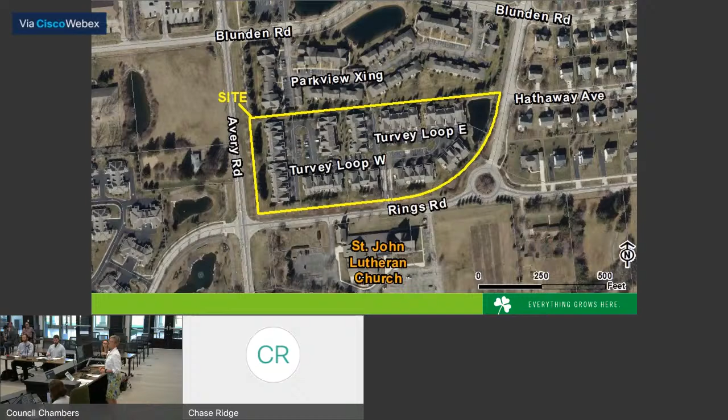Thank you, Madam Chair. Good evening, Commissioners. This is the Balgriffin multifamily chimney request, specific address 6138 Turvey Loop East, and it is an amendment to a final development plan. Here on the map, you see the extent of the townhome project within the Balgriffin PUD. It's at the northeast corner of Avery Road and Rings Road. Highlighted here is the specific building that we will be talking about. There's one unit that is making this request. It's in the center of this particular building.

A little bit of background for you. In 1993, the Balgriffin PUD was approved. In 1999, both the preliminary and final development plans were approved with a condition of approval that read that rear and side elevations, which will be most visible from public streets, be revised to reflect the same level of quality of materials and detailing as front elevations. As it turned out, all of the elevations were developed the same. In 1999, the townhomes were constructed. Sometime between 1999 and now, in this one unit, structural issues have occurred. The applicant is here tonight to talk about those in detail. But here we are in 2021 with a request to remove the chimney from this particular unit.

These slides show the existing conditions at the back of this one building. The yellow area outlines the chimney in question. Please take note of the materials, because what's being proposed is that the materials will match exactly. Also take note of the role the chimney plays in the architectural interest on this building.

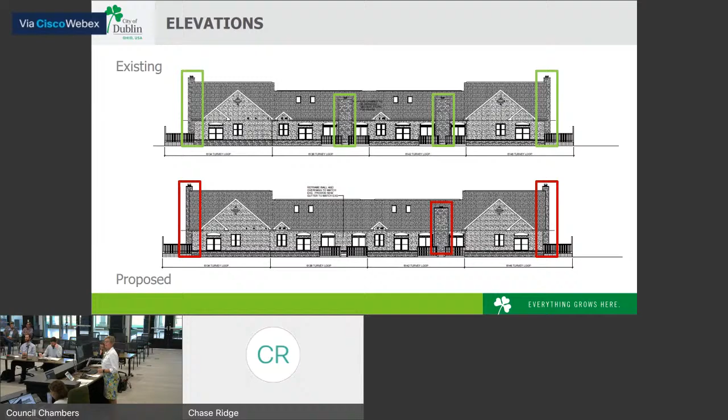Walking through the proposal in some detail so everyone understands the exact proposal: the chimney would be removed. The stone would be saved to reuse later in the project. The stucco would be patched and painted the Sherwin-Williams quinoa color. The roofing, cricket, and gutters would also be patched.

Proposed are timberline shingles in a weathered wood. The stone water table would use the recycled chimney stone to be patched. The deck would be patched, and an electric fireplace would be installed so that no outside venting is required.

We did review this application against all of the amended final development plan criteria, and staff is recommending disapproval with the following findings. Visual interest was an important element of the 1999 application, specifically that the architectural detail was supposed to be the same for front and rear. Removal of the chimney reduces the detail significantly on this facade.

Secondly, the originally approved facades relied on stone-clad chimneys as a primary element of interest. Removal of one chimney in an otherwise symmetrical facade does not meet with the intent of the approved FDP.

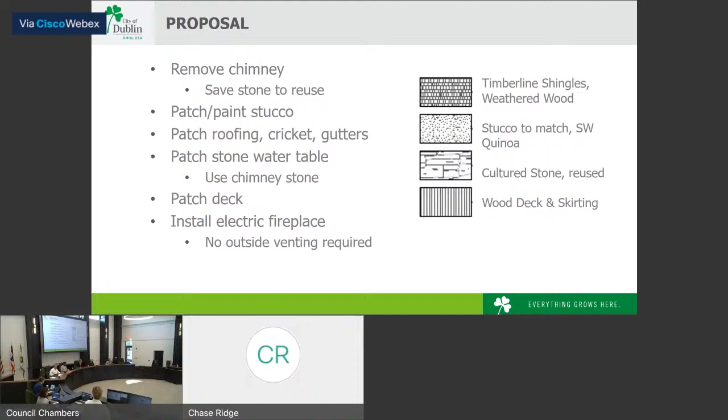and highlight the public streets that adjoin the development? The public streets are Avery, Rings, and Blunden Road. And the intent of the original application was that the facades facing public streets were the ones of most concern. Is that correct? That is correct. Okay, thank you.

Any other questions from the commission for staff at this point in time? Mr. Schneier: In the planning report, it was indicated that the Building Standards Division had a recommendation, or suggested a recommendation, for the hydraulic, the sistering, et cetera. Could you expand on that a bit, on what process they used?

I don't want to pretend to be a building inspector or someone who knows too much about construction, but more than me. The way I understand it, this particular chimney, which is cantilevered off the floor joist at the first floor, is now too heavy for those joists and is causing a kind of rotation inside the building. The possible remedies included sistering the floor joists. This unit does have a basement, and there are certainly foundational options like mud jacking and other kinds of jacking systems you can use. That's about the extent of what I know.

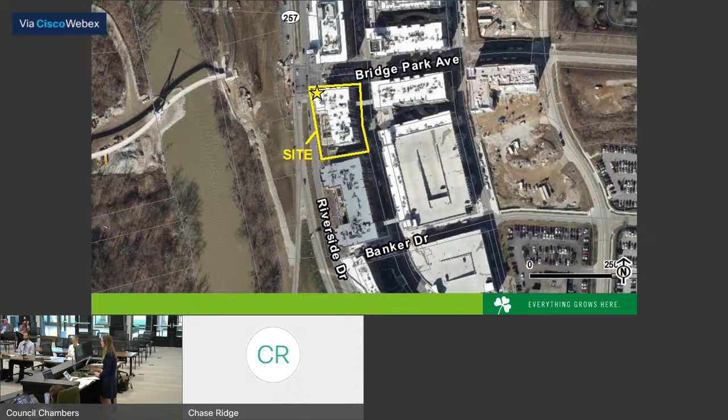A bit of development history that the commission may recall: this development was originally approved in 2015. At the time, the developer was required to designate a shopping corridor. Shopping corridors are intended to be uninterrupted pedestrian ways that allow for the activation of the public realm for outdoor seating and dining. The shopping corridor comes with an additional requirement that 12 feet of width be provided.

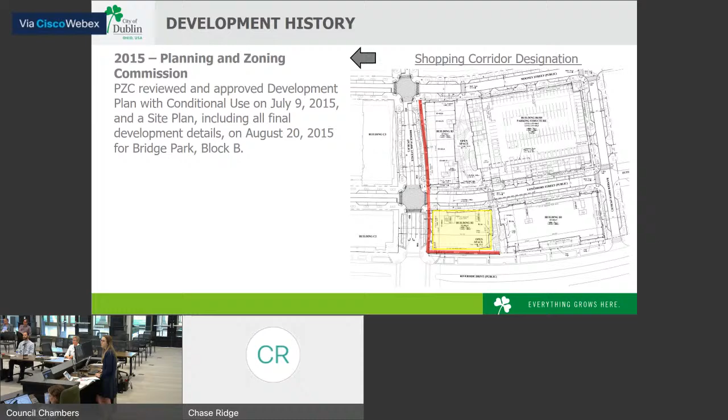Additionally, the Pocket Plaza located adjacent to this tenant space was also approved as part of the open space plan. At the time, there was a condition of approval, detailed in your staff report, that the developer work with the city and the Dublin Arts Council to finalize elements in that Pocket Plaza. The tenant modifications this evening are triggering compliance with that condition, as well as considerations of the details, not only within the public realm, but also on private property, as shown on the screen.

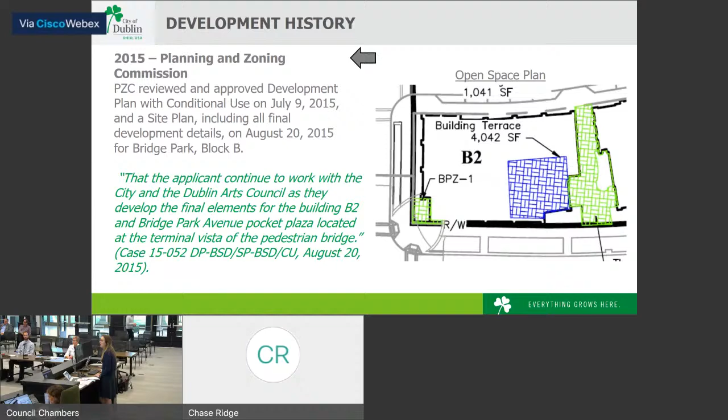A bit of case history: as the commission may recall, this has been before you twice before at the recommendation of the administrative review team. The commission made a number of comments which the applicant has addressed, including enhancing and elevating the design to create a sense of place. You'll see the updates between June and August on your screen, being reviewed here on the second day of September. The applicant has retained the Pocket Plaza.

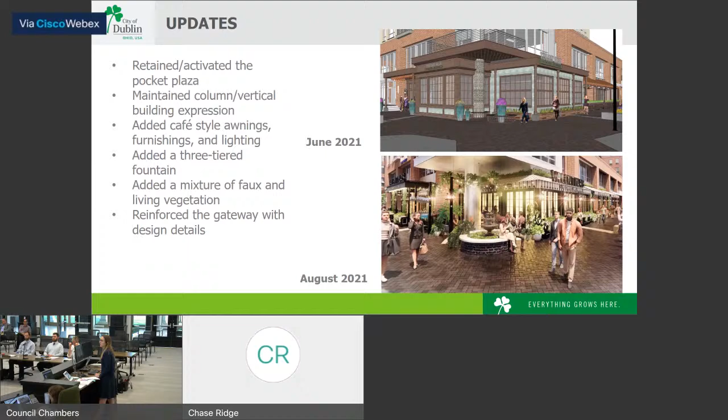You'll notice that the addition is no longer encroaching to the same extent it was previously. With that, the column and the vertical expression of the building from grade to the upper stories is also retained. The applicant has incorporated a number of the inspiration images that the commission previously identified, including Parisian cafe-style awnings, furnishings, and lighting. Additionally, at the corner a 3-tiered fountain is proposed, located within the City of Dublin right-of-way. The design is augmented with a mixture of artificial and living vegetation, and all of this together really reinforces that gateway design.

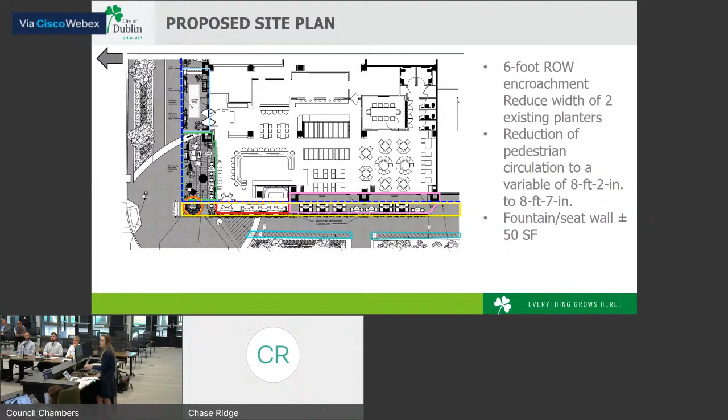The right-of-way line here is denoted in a dashed royal blue line. In yellow and teal, you'll see the proposed 6-foot right-of-way encroachment, as well as the modifications to the existing streetscape planters to reduce their width by approximately 2 feet, allowing a total clear area of approximately 8 feet in width, where 12 is required. Staff is recommending approval of a waiver to permit a reduced sidewalk width in this area, as doing so would achieve the goals of the Bridge Street District by allowing additional opportunities for outdoor seating and dining that engage the pedestrian realm.

Here are photos of the existing conditions of the site. At the request of the commission, the engineering technician and planning technician with the City of Dublin visited the site this morning and taped out the blue line, which is the right-of-way line. You can see it best up against the building. The yellow line is the proposed new face of building, and the orange square is the portion of the fountain located within the public right-of-way.

You'll notice on the right-hand photo there are a number of flags appearing in the planter bed. Those flags are intended to indicate the modification to that planter area. So you'll see a reduced pedestrian area that's also increased by those modifications to the streetscape.

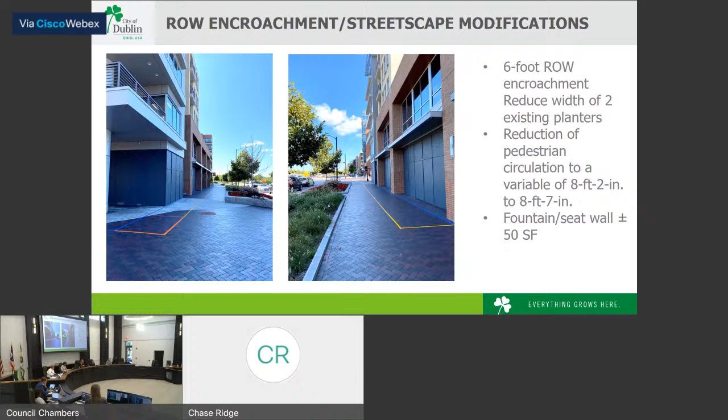Additionally, detailing—excuse the interruption, Nikki. Can you go back one image? On the left image there, in the planter, that what appears to be a red line, is that a continuation of the flags to indicate where the new walk path would be? Yeah, so the red line is the beginning of that. Okay, thank you. Again, excuse the interruption. Yeah, no worries, that's a great question.

So in detail, the Plaza and Fountain is located in this proposed orange area, partially along private property and mostly within the right-of-way. Planning, parks, engineering, and police are recommending that the fountain be eliminated with this design. The conceptual design is provided on the screen and is approximately 4 feet in diameter and 7 feet in height.

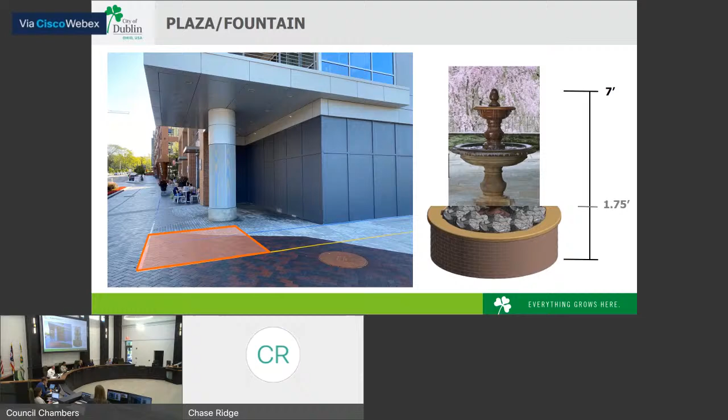In review of this element, it does further constrain the pedestrian realm within the public right-of-way and is visually incongruent with the established streetscape character as well as the base building.

So the applicant has provided a number of character images which fully detail the proposed restaurant. The entry located along Bridge Park Avenue is highlighted by a proposed canopy structure.

The canopy is black in color and will be grounded with planter boxes with a gold accent. The entry incorporates additional storefront windows as well as a revolving door. Interior to the canopy, there are marquee lights as well as the additional layer of detail to incorporate coach lights as well as an awning valance.

The awning valance design is carried across the extent of the storefront facade. So at the intersection of Riverside Drive and Bridge Park Avenue, the applicant is proposing to activate the Pocket Plaza. This Pocket Plaza would still be publicly accessible, although would be amenitized for customers of the restaurant.

So the applicant is proposing to further define the space with landscaping and lighting, as well as to highlight the portion of the enclosed patio space with a partial awning as well as operable windows.

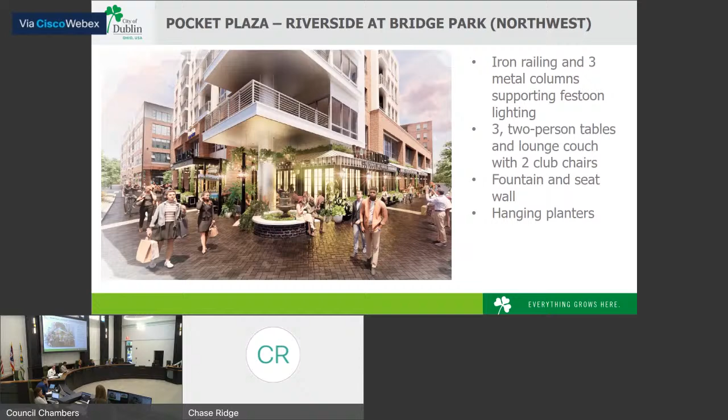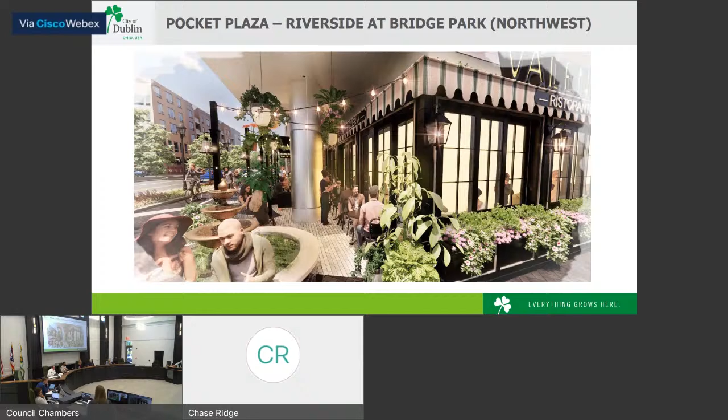Here's another character image of the Pocket Plaza. You'll see here a variety of movable seating and chairs, as well as those intimate gathering spaces.

So as we look at the west elevation of the restaurant, there are both enclosed patios further to the north, as well as a covered patio to the south. All of the portions of the patio have operable windows in order to blur the line between the public and private realm. The awnings are continuous and accent each portion of the building.

The awning also is complemented by artificial vegetation, which is being conditioned by staff to be removed. That is located above the awning and is intended to be placed year-round. Staff has expressed concerns regarding potential bird habitats as well as advanced aging of the artificial plant material and awnings due to those locations.

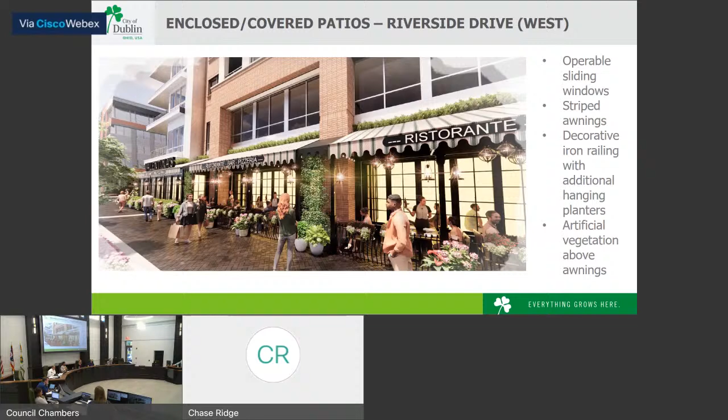So with this application, as the Commission would expect, a variety of furniture selections are also provided. The applicant is proposing a mix of seating as well as table types.

A total of 5 light fixtures are proposed. Staff is conditioning that the applicant provide a photometric plan with their building permit. The intent here is to confirm that the site is compliant with code and still allows for the layering and dimensionality of light fixtures. Additionally, the applicant has indicated proposed landscape materials, which include a variety of...

...movable plants as well as hanging plants and a gelato cart. Staff is recommending that the opportunity for all of these moving elements, with the exception of hanging plants, be retained, and staff is supportive of the gelato cart as a potential placemaking element.

So in review of the waiver, staff is recommending approval of a waiver, although with the exclusion of the fountain and seat wall. In review of the minor project review, staff is recommending approval with 9 conditions. These conditions are as detailed in the presentation as well as the staff report.